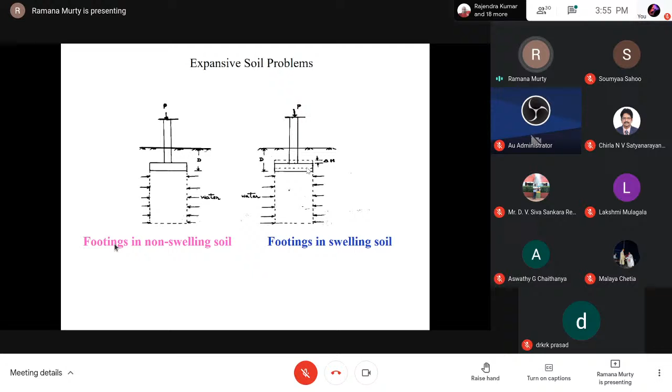Now let us see the mechanism of how this water is gaining strength, as I just referred. All soils will have some quest for water; that is in the form of matric suction, because soils are particulate.

Hello? Sir, can you tell me, are you audible? You are audible, sir, but my video seems to be off, I think. No, it is coming, the slides are moving also. Okay, then it is all right.

So here, these negatively charged particles will attract the positive ions, and once these positive ions are attracted, don't think that this positive is really positive - they also have their own affinity for water. This energy also will be satisfied by negative energy again, meaning anions again will be attracted. If anions are not available, more affinity for water will be there.

Truly speaking, all cations have their own affinity for water; that is what is called cation hydration. That means the negatively charged particle attracted positive ions to satisfy its own problem, and in turn these positive ions are holding water molecules on their surface. This ion is his guest, and again these guests are also his guests.

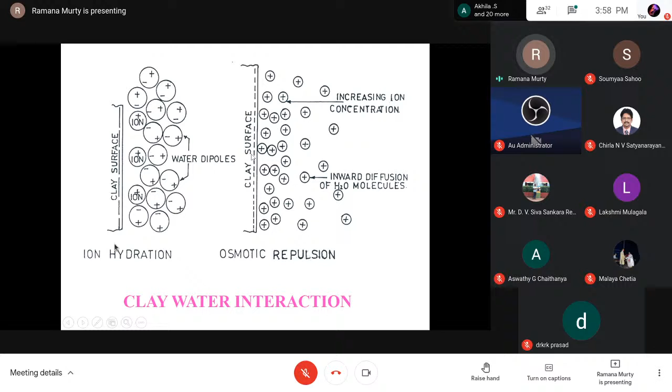Then in the field, when we are taking up projects, we should identify these soils. How can we identify? Sometimes we may confuse also - don't think that all cracks belong only to black cotton soils. This cracking is distinct in case of black cotton soils, just like a map we can see, then we can suspect their presence.

Especially when they are wet, if you are walking on any conventional soils, a little mud can stick to your shoe. But in case of black cotton soils, the thickness of the clay that could attach to your shoe can be up to half a foot. That is possible - that is why there is stickiness to tires and shoes when wet.

Difficulty in breaking a dry soil pat between fingers - this is all because the black cotton soil during shrinkage or drying will be subjected to a suction pressure or desiccation stress of the order of 100 to 150 tons per meter square. That is why, during the shrinkage test, whatever density the pat attains by simple drying, you and me cannot achieve by any amount of rolling. That is all because of the capillary stresses.

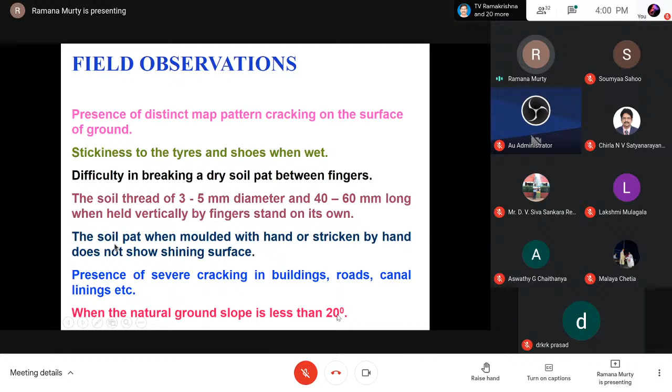Generally in black cotton soil areas, the ground will have a mild slope only, less than 20 degrees. This is how the ground can break even up to 3 meters depth. This cracking could extend, and truly speaking, this type of shrinkage cracking is healthy for cultivation.

Agriculture scientists say when this ground breaks like this, any unwanted materials can be oxidized and neutralized, and it will be fully aerated. That is why this clay can remain healthy for a long time. That is how this type of behavior is appreciated in cultivation or agriculture.

But in case of civil engineering, only the trouble starts. In case any of our infrastructure, especially roads, is constructed on these soils, it simply cracks, and the road material - base course, sub-base course and all that - they are also after all aggregate and soil only, so they also crack. Ultimately, this crack can be reflected to the surface. That is the problem - our pavements can simply break like glass pieces.

This is how the cracking distinctly appears on the surface in the form of a map. Any other soil can also have cracking, but not this intensive. That is how we can identify their presence.

And of course, exactly based on the testing, we can confirm with 100% mineralogical identification - identify the mineral. If it is montmorillonite, definitely it is expansive soil.

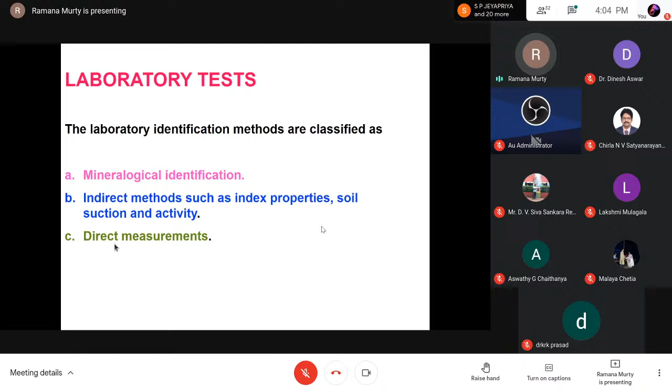That gives both the volume change and also the pressure that could be developed if you suppress the volume change. This is what we were referring to - high liquid limit and low shrinkage limit, suction, all these are the measurements. More suction means more affinity for water. More affinity means more damage. That is how we have to be clear.

And of course, swell tests - differential free swell index is easy. 10 grams of soil passing through 425 sieve, we will place in 100 ml distilled water, and similarly in 100 ml kerosene. The difference in volume divided by original volume, all that we can measure. If it is close to 100, again we have to be careful.

This is what I have just now explained - in the consolidation test, swell potential and swell pressure. Under 5 kPa surcharge, it is allowed to swell and again consolidate it back to its original volume.

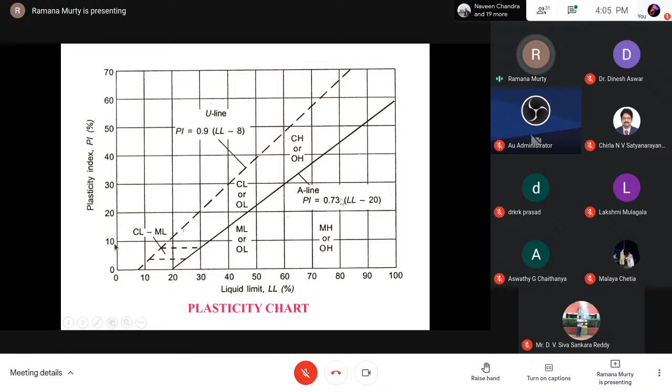And even by simple index Atterberg limits, using this plasticity chart, one can plot the point. See, A line is the Casagrande line. This is another line given, the U line. Points for black cotton soils will fall within this band between A line and U line. U line equation: 0.9 into liquid limit minus 8. This is already known to everybody. And this is another chart given based on the activity of the soils - clay fraction and plasticity index. Depending upon this, these are all divided into different bands.

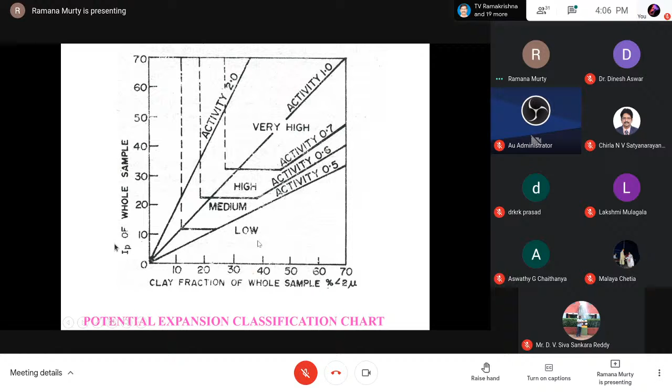If it is falling here, it is high band, medium band, low band—all of that is already mentioned, so one can easily identify the swelling nature of the soils. Different authors have given their own way of identifying these soils, but of course there are several overlaps. Despite that, we can still have an idea.

Just now we said shrinkage limit less than 8 is very critical. Here also similar values, except one or two sources say 10, which is fine. This one is from America again—they have taken multiple parameters. Colloidal means clay colloids, especially if clay colloids are close to 30%, with shrinkage limit just less than 10.

This indicates expansive soil, as a blind rule. So we can suspect, understand, and measure the soil pressure, and accordingly we have to design the foundations.

Then, based on activity, which is plasticity index divided by percent clay, if it is more than 1.25, we can suspect a high degree of expansion.

ASTM has also come out with the expansion index under 1 psi load, just like the consolidation test. Here a 1 psi load is applied, the soil is allowed to swell, and the expansion index is measured. If it is close to 100, it shows a high degree of swelling.

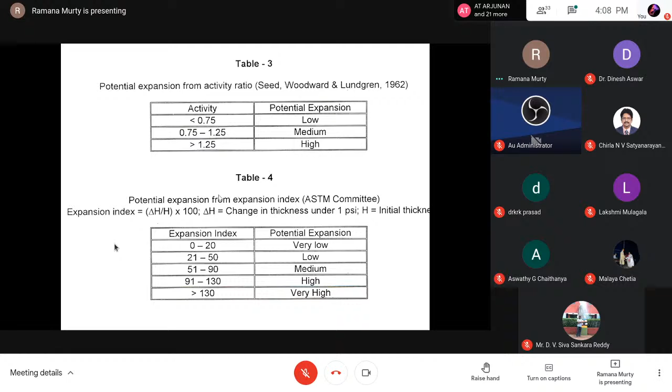Then, regarding suction, as I mentioned, more than 300 is very high. This value is given by Snethen. When the suction is more than this, the soil can show a high degree of swelling.

Please understand, by itself the value will not reflect the whole problem. Expansive soils, despite their problem, if you can protect them against environmental changes, will sleep silently. The problem starts only when the environment changes. By itself the soil may have high degree of swelling, but if the environment is not conducive, it doesn't show its effect.

That is why such foundation techniques are also available—little later we will see that. After understanding these fundamentals, we have come out with some ideas on how to nullify them and how to silence them.

Professor Sridharan, instead of kerosene, has given a method directly with water. For example, 10 grams of oven-dried soil passing through 425 micron sieve is placed in a 100 ml jar, and he has given this measurement.

If it is 4 cc per 1 gram, then the degree of swelling is very high—meaning if 10 grams of soil becomes 40 cc, it is very high. If it is around 3, it will be high, something like that. One can directly depend on this instead of using kerosene and all that.

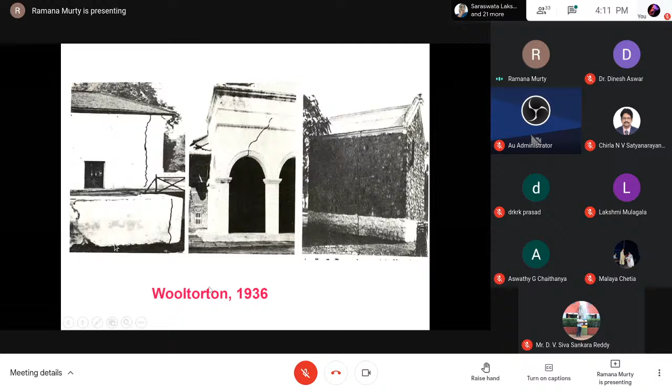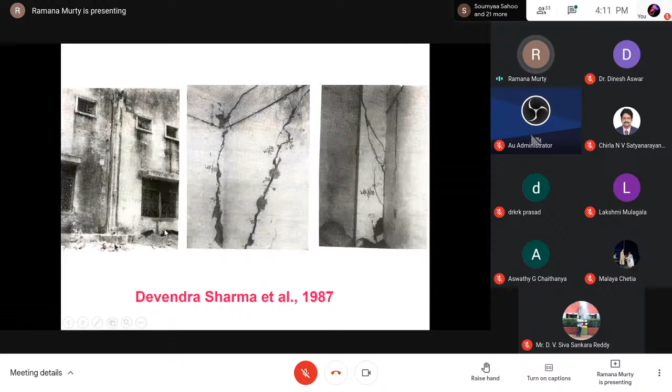He is from Burma actually. This one is from India only. This is also from India. So there have been many failures across the world.

During shrinkage, long snake-like cracking is possible. Once this type of cracking occurs, the rainy season comes and water enters, and the underneath clay becomes slush and mud, which gets pumped out. So pavement distress will be highly accelerated.

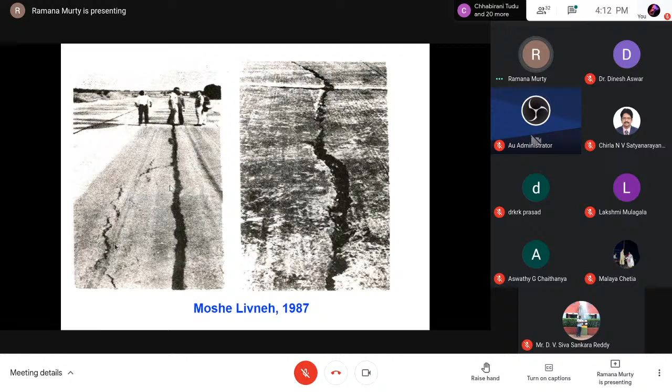So this is the problem with this type of clays present below the pavements. In case of monsoon, the same clay can become like this. Is it highway or mudway?

So friends, despite all this, using the technology, we can silence these soils. Otherwise, it seems very difficult, is it not? But if you understand the mechanisms, you can use that technology and silence these particles so that they do not show this much affinity for water. How are they becoming slushy like this? It is only because these particles are able to hold a lot of water. The sand and gravel do not attract water, but these particles are attracting water. That is the very problem.

Of course, that is only the source of life. I have just now already said, at clay mineralogy, you will see the philosophy behind all this.

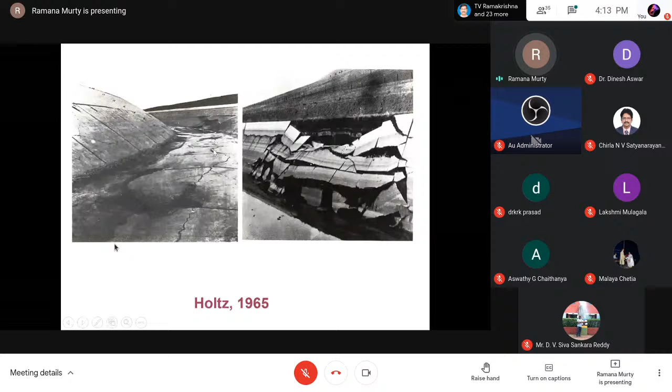Yeah, these are some of the failures even for the canal linings. Crores of rupees we may lose because of these losses. This is again Kakatiya Canal passing through Warangal city, and it is peculiar. It is from Sri Ram Sagar project, 280 kilometers away, only near Warangal, close to KITS Engineering College, for 100 meters long, severe cracking we have observed. And to my surprise, the clay behind, when we tested, the differential free swell index was around 700%.

Very peculiar, only there. Beyond that, it is not there. And of course, for such a high degree of swelling, CNS layer technique is only available in case we do not want this type of failure. Maybe it is better to supplement two techniques: first silence the clay using some lime or calcium chloride, something like that, then put the lining, CNS layer, then lining. Otherwise, again, 700 DFS means merely CNS layer also may fail. In fact, here also CNS layer was provided, despite all that, this is the failure.

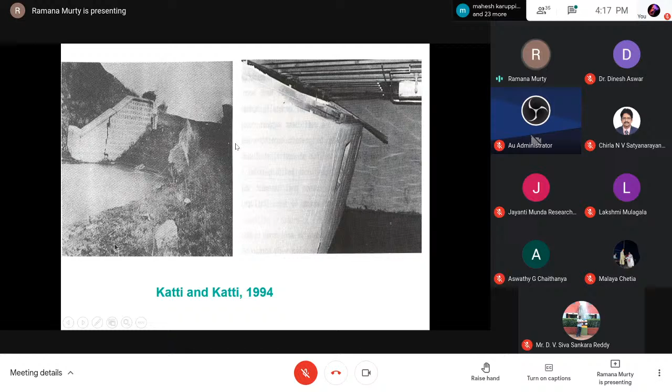Okay, at several swimming pools, etc., in fact, I myself was consulted, and again we have given the same suggestion. Fortunately, that technique worked very well. When I suggested filling good soils at 45 degrees, almost all walls became safe. In fact, there were some failures, and subsequently they could be addressed like that.

Yeah, these are some of the failures in Ordnance Factory, Hyderabad. In fact, during 2013, NIT Warangal was asked to give a certification to their campus buildings. There is, it seems, a norm: as per the defense norms, these buildings are to be certified by the institute every 5 years. So we were asked to do that during '13, and a team of our professors visited several times. And it is also very peculiar.

The area of this Ordnance Factory is around 3,000 acres, out of which almost half the land is black cotton soil, and the other side is all moram soil. On the black cotton soil area, they constructed some 800 staff quarters. I think they said it was during 1985, something like that. So subsequently, these quarters were subjected to this, and they almost became non-livable. See how critical the condition is. All these were simply broken.

These floorings, etc. See, that is why we can easily understand how much load will come on each beam, which we calculate in RCC designs. See how even nature has demonstrated it - this trapezium shape. When it is held and lifted, it breaks like that. In fact, the doors also sometimes we cannot open. That is how it has become.

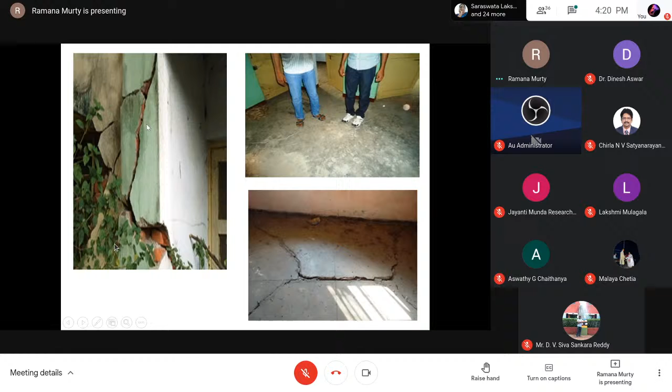Yeah, this is how we were observing, and this is again internationally also. We normally see that if you say something, people also may not believe. Then for the same conditions, internationally also, you see this figure we have taken from Professor Chen's textbook. He has exactly shown below the strip footing, continuous footing, the failure. So it is matched - so we could convince the officials why we are really suggesting demolition of them.

Yeah, here in fact the whole mechanism lies for this type of behavior. Friends, nature is so great - out of a great process, clay is formed. Like our blood, milk, clay is one of the extraordinary makings by nature, because it is this clay which supports all the life - bacteria, virus, fungus, and through that again all the plants, and through that again all the life, the animal kingdom.

Otherwise, in the absence of this clay, nothing could live in this world. That is why one of the philosophers says the true prosperity of a nation lies in its clay. Simple statement. If not immediately, in the long run also one can ultimately understand this truth only - the true prosperity of a nation lies in its clay.

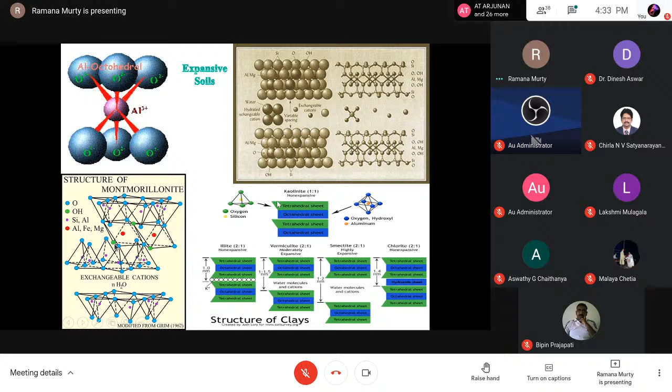At least it will stay with the clay unless the environment is changed to a greater degree. So like that, we have to silence the system. At the same time, we have to be very clear, we are not changing the mineral, friends. Please understand, these are already transplanted, they are like that. We are not doing anything. On the surface only the ointment is being applied in the form of stabilization, to satisfy the negative charge. That is how we have to understand our stabilization techniques.

Of course, all these different clay minerals - this is, of course, smectite, meaning montmorillonite only. In fact, vermiculite is again more swelling than montmorillonite, but fortunately in nature the content of vermiculite is less compared to montmorillonite.

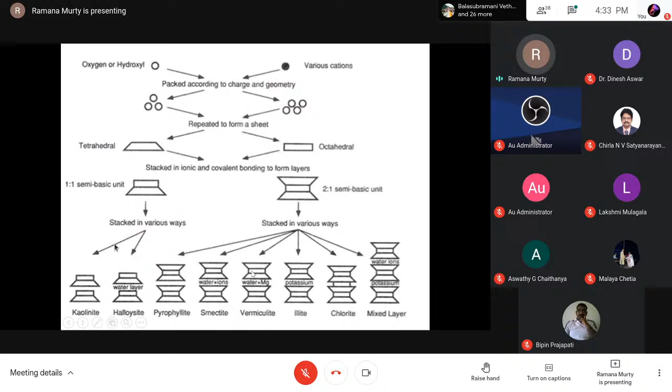All these principles you cannot blindly apply to this type of system. That is why Terzaghi himself said, in case of highly plastic clays, my theory of consolidation is doubtful, and also the effective stress principle.

Under remediation, clays are giving problems. In case the thickness is thin, remove that, be happy - that is how the soil replacement concept was given. As long as the thickness is shallow, within 1 meter, we can happily remove it and replace it with good soil, then all the problems were nullified as a civil engineer.

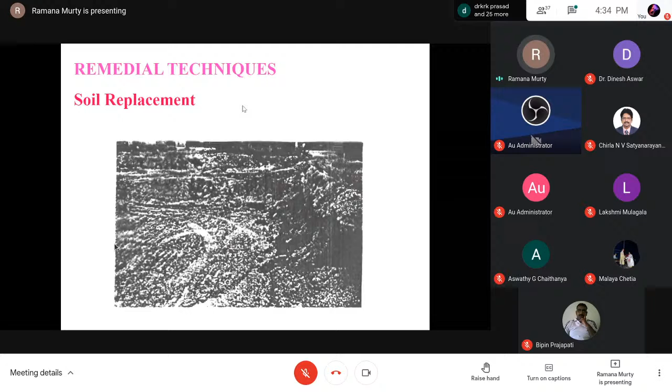Of course, another idea - this clay, just now I have said, despite all the aggressive swell potential it has, it is only the environment that triggers the swelling nature. If at all I can create an environment such that the clay can remain in one condition, then it also keeps quiet. Philosophy is excellent, but in actual practice, this technique was not that successful.

The philosophy of this is, anyway it is attracting water subsequently after construction and again undergoing volume change. So much before construction itself, we apply water, then it will be saturated, construct, close it, then as long as that high degree of moisture content is there, it will not undergo higher volume change. Philosophy is correct, but however in actual practice there were several problems also, because here it is not only volume change, bearing capacity is affected.

The moment you pond all the area, it becomes slushy, the required bearing capacity also we will not get - another problem. And in fact, some researchers have reported this high moisture content will not remain there only, it can pass through to the other zones where the moisture content is less, and again it triggers the swelling there. Ultimately, that is why this technique is not that popular across the world.

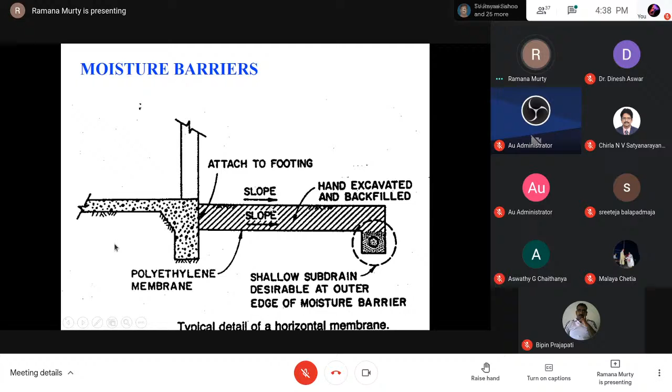Of course, for pavements, etc., this type of vertical moisture barriers are suggested. Of course, Professor Chen, what he has written, yes, all these moisture barriers can slow down the process of saturation, but ultimately everything will be saturated. But just now I said, despite that, the damage potential will be less because of this low entry of water.

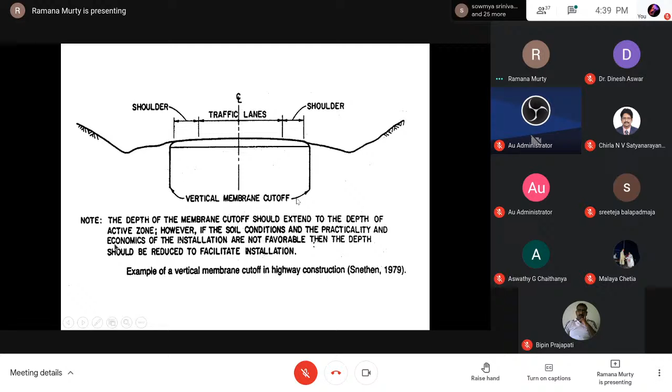This is again lime stabilization, cement stabilization, all this again, we have to mix with the soil, plow it, then roll it. Not easy. In fact, recently we were asked to give a suggestion for a rural road in Guntur district for lime stabilization. When we have given that suggestion, in fact, honestly, the contractor has taken our report and started the work. But the whole problem is the IRC suggests that all the soil to be lime stabilized should pass through,

I think 25 mm, and 80% of that should pass through 4.75 mm. See this, it has become very difficult for him. Ultimately, he could not pulverize.

Later on, again, we were forced to change our report, indicating that until state-of-the-art equipment could be imported by India, these techniques may be difficult for their implementation in practice, something like that.

But fortunately, in the recent times, we could see Stable Road. It is from Germany. That is doing excellent job. In Vijayawada, in fact, for one of the roads near Poranki, we have suggested that there, that machine itself will

excavate. If necessary, dry it also a little. Then whatever the cement content you suggest, that will be added. And after adding it again compacts, that means all in one. Excellent. After that, we have become little confident to do some stabilization.

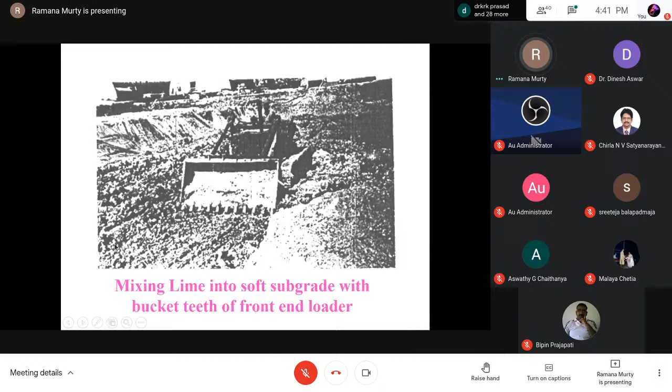Yeah, again, at the end of that, again, it must be properly compacted also. Yeah, this is what I am referring. This road only, degree of pulverization could not be made. In fact, for 2 months he struggled. Ultimately, when the degree of pulverization is not adequate as per the standards, again stabilization remains doubtful.

And in case if it is not worked, we will be blamed and he will be blamed. So then what we have written is, again we asked them to recompact the whole thing as usual. Then 2 feet thickness of the murrum cushion we have suggested to be placed on this clay bed, so that based on that 2 feet thickness of the murrum, the CBR value was arrived at, and then the pavement design was made and constructed.

Okay, in that report only we have suggested, because they wanted to send that report to the rural development ministry. So in that we have written the same lines: until the state of the art equipment could be procured by India, these state of the art stabilization techniques cannot be implemented in the field, something like that.

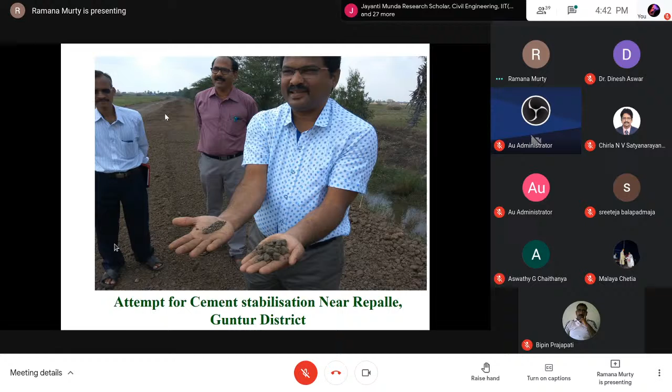This is again where everybody outside asks us, sir, we will place some sand in the foundation, is it okay?

Normally in some research papers it is written that sand cushion becomes effective when you research within 1 or 2 years. We may feel it is effective, but beyond that it also becomes very hard. When it has some way to accommodate the volume change from the underneath clay, just like a cushion it can act, but after a few years it also will be densified and ultimately become very stiff.

Along with this lifting, the foundation also will be lifted. That is the problem. At the same time, sand being highly permeable, it also attracts water quickly, as I have already said. If anything enters quickly, there lies more danger.

In fact, at Mote village in Karimnagar district, some time back, government built a colony for poor people. It is all black cotton soil area, so we do not know - somebody suggested they have gone up to 9 or 10 feet depth.

It is not footing foundations, but continuous foundation - 10 feet depth trench, filled up to 7 feet with sand. They again constructed the footings and came out. After all, they are all single-storied buildings only, so you can imagine top 3 meters, below 3 meters.

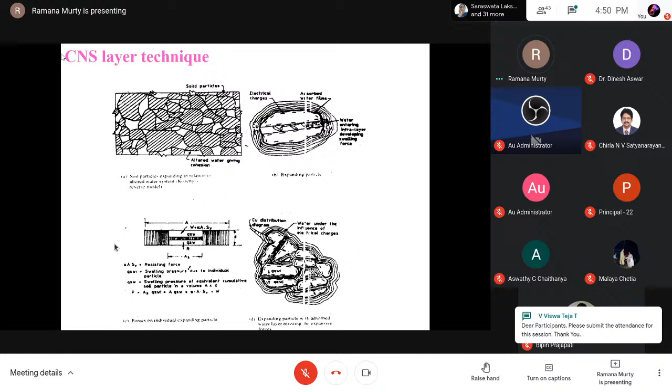So in this direction, though conceptually it seems very nice, in reality again there are problems, in the sense that the material specifications are not that easy to satisfy. In Telangana region, as we are here, mostly we are fortunate that moram soils satisfy to the extent possible, though not exactly, to some extent. But that cohesion must be there, and that cohesion is being satisfied, though other contents are not that satisfied.

And again here also, Katti's suggestion is very difficult to follow. What he suggested: if you are constructing a home, all the area below the building, over the entire plan area, is to be excavated around 2 meters. Then the CNS layer is to be compacted by 1 meter, construct your footings, then fill back again. Very difficult. So anyway, that is how, friends.

At present, based on our experience, what we are suggesting, in case this is to be adopted, is 1 feet extra on all sides of the footing. Construct like that, with a minimum 1 meter thickness, and here also this clay, everything will be there.

Anyway, basement filling can be made using the same CNS soil so that it will mostly be free from cracking. And of course, if the black cotton soil has a high degree of swelling, it is still better to supplement two techniques instead of only one. Here, simply put a few bore holes, either calcium chloride or even lime can be filled, and then filling here the moram soil will be useful.

Of course, above the ground level, to have the plinth, that plinth filling must use the cohesive non-swelling soil layer. Below that, anyway, clay is present.

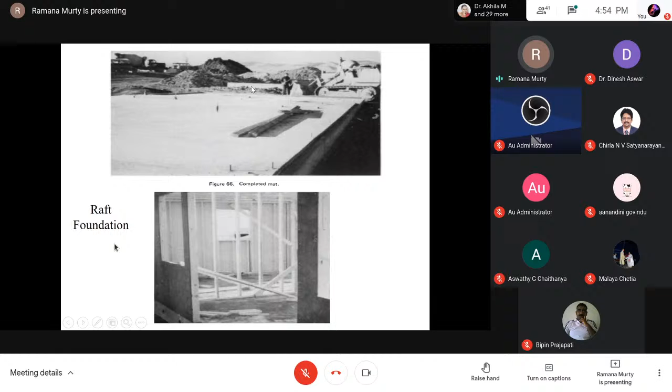But the cost is again too much. That is another problem with this raft foundation. If it is a lightweight structure, all the money will go to casting this raft only, and ultimately we will not have any money to construct our home. That is the problem. So don't think this only applies to the building and its foundation.

Sometimes slabs on the ground, basement floors, all this comes under that category too. In the slab on ground concept, all these flooring slabs are placed on the ground, and you can see how they are subjected to damage. Exactly at 0.6 to 1 meter distance, this type of failure was noticed all across the world.

That is why Professor Chen suggests that at this location, around 0.6 meters, if you provide a joint, it will move right there. At 0.6 meter distance, provide a flexible joint so that it can slide along that joint, and this type of failure can be avoided.

If we have sufficient money, it is better not to depend on slabs on the ground at all, rather than this type of slab on ground. We can go for structural floors also.

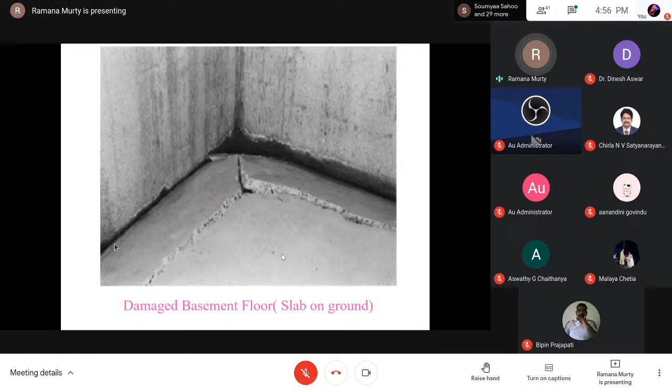When the slab must be constructed on the ground itself, some techniques are suggested. Don't directly place the slab on the ground. Inside, put some form work to create honeycomb holes. That means the swelling, if present, can be accommodated into this opening rather than exerting pressure on the floor slab. That is how these designs were suggested in cases where slabs on expansive soils are inevitable.

Below the grade beams also, this void is needed, even in our under-reamed piles, all along the grade beam below that a 10 centimeter air gap is suggested by the code. In other countries they maintain this using concrete panels. In India, we can easily do that by placing bricks on edge on both sides so that this void can be maintained.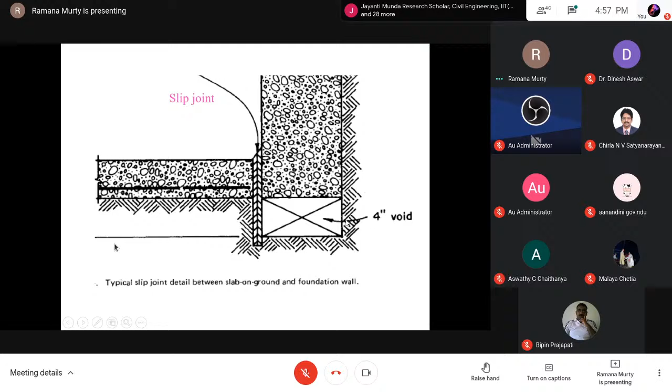This is what I was referring to. See the connections, water supply - when this floor slab is lifted up, this is subjected to distress, and the whole wall itself is subjected to buckling because of the lifting from the floor slab. So it is better to have a slip joint here or here, then this pressure will not be exerted on the superstructure.

Even for partition walls, we should not be too careless. Simply constructing a partition wall between the ground floor and the upper floor means the moment this floor slab lifts, enormous pressure will be exerted through this wall onto the roof slab. So to overcome that, this type of joint is suggested, so that even if it moves, it doesn't harm the superstructure.

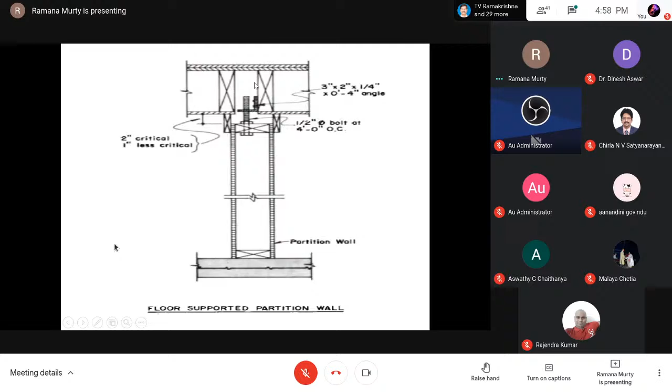These are some ideas suggested across the world. All around the building, in case there is some problem, grouts can be injected. The range of grouts varies from organics, lime, calcium chloride, to recently developed chemicals. Based on requirement, efficiency, and the consultant's suggestion, such chemicals are injected into the foundation in case there is damage to the structure, as a remedy adopted all around the damaged structure.

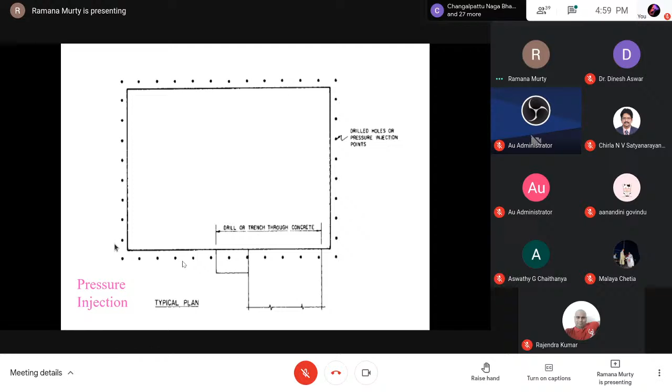This type of stabilization is attempted under pressure injection. Here also the limitation is that clay only absorbs the chemical grouts when it is dry and has desiccation cracks. When it is wet, nothing can be injected into it. That is another problem.

These are some of the remedial suggestions. Be careful and always provide for movement. Sometimes the partition need not be supported on the flooring - it can be suspended from the roof slab also. In that case, a slip joint can be provided wherever required to accommodate the movement. You should not be blind to this; somehow everything has to be taken care of.

This is what I was referring to - in case of continuous walls or continuous footings also, give a gap. Don't provide it continuously. If that is the case, we really need to go for this type of construction with gaps, or go for pad foundation itself, and provide a grade beam here. That is wiser than having this type of voids in between.

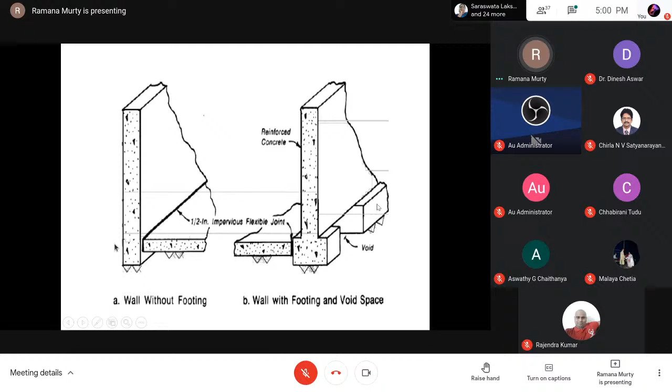This is how the void below the grade beams is maintained, using precast concrete and so on. But in India, we are using simple bricks, which is enough also, and we can maintain that gap easily.

Here again, the gradient is very important, as we were just referring to. The precautions are all given here. If capillarity is to be broken, put large size aggregate, then a geomembrane or something similar so that the moisture content does not go up. All these precautions are given again to protect our floors.

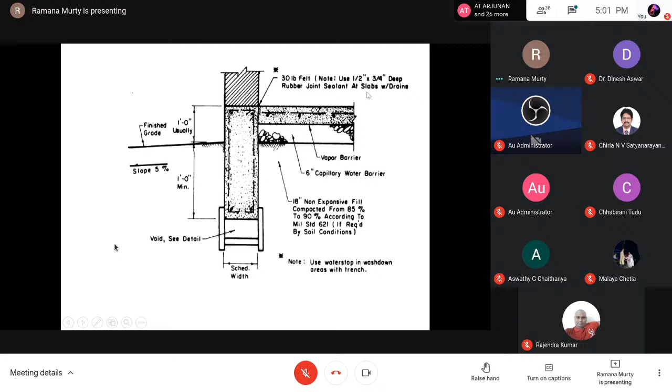This is another idea - in case the natural ground system will not really allow it, a mound is formed, and on top of this mound a geomembrane is placed. Over that, good non-expansive soil is placed, and on that a raft foundation is constructed. As I said in the beginning, it is the environment that triggers the swelling, so all these slopes are maintained so that water can easily go away from this zone - then it may be safe. That is how this type of idea is used, especially when the degree of swelling is too severe.

All the water supply and sewage lines are also kept well within the non-expansive soil.

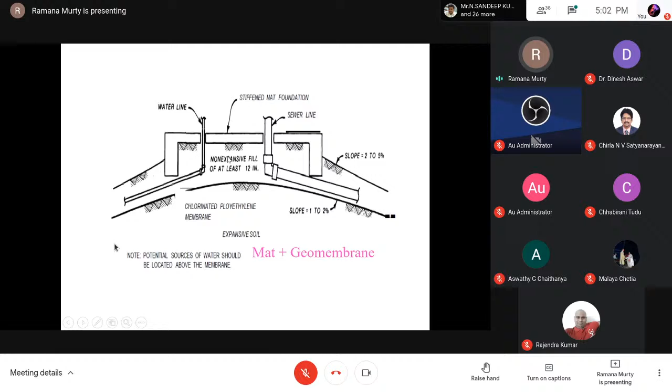This is how sometimes a geomembrane can be supplemented. In fact, at Hyderabad Ordnance Factory, we did not suggest this geomembrane because that much accuracy may not be followed, and ultimately we do not know what happens - on the name of adopting this geomembrane, they may compromise other quality. Instead, we suggested placing a minimum 2 feet thickness of CNS soil over that, after removing all the grass, sloping it like this, and at the end giving a trench of 1 feet thickness filled with aggregate so that rainwater is collected and discharged into the street drain. Something like that we suggested.

Now let us see some of our personal experiences.

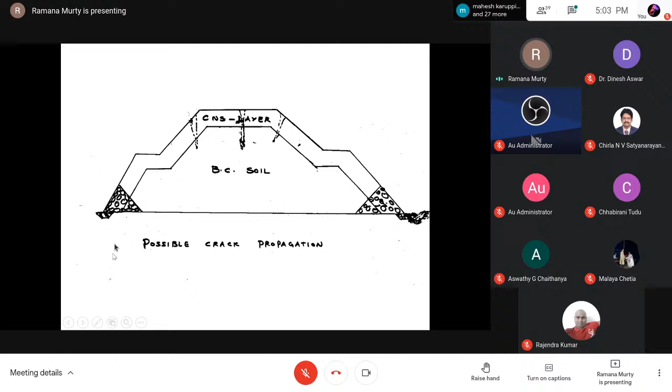This is the flood bank constructed for Singareni Collieries, about 5.6 kilometers long, near Ramagundam. The height is around 5 to 6 meters, with one place at around 7 meters. This was constructed during 2000. Immediately after completion, within one season, the entire embankment severely cracked.

It was all built only of black cotton soil because at that location no other soil is available. We had given the technical report suggesting it can be used, but with a protection layer of CNS layer. Accordingly, everything was done, and ultimately this is the situation. Uneasiness was there, and the payment was stopped to the contractor because of the severe cracking.

Subsequently, we were called to the site again, and we suggested this: this is all a very natural process, it has reflected what all is truth. If it is not reflected now, tomorrow it can reflect. Instead of penalizing the contracting agency, let it be closed repeatedly with the same CNS material - within 2 to 3 seasons the whole system will come to its own self-equilibrium.

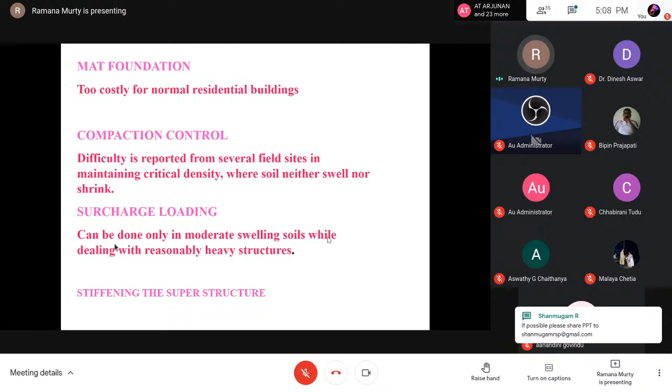Surcharge loading: if the swell pressure is, say, 10 tons per meter square, if you keep 10 tons per meter square, it can remain silent. That is the philosophy. But the problem is, sometimes in some locations this was a success, but in certain locations it did not work. The whole problem is, you determine 10 tons per meter square and keep the foundation load exactly like that, but underneath, if there is some other layer with more swell pressure, that becomes a problem. So if the soil does not have uniform swelling nature, then this technique is also a little doubtful.

Then stiffening the superstructure, in the sense RCC bands are generally provided at different locations, at the window level, top of the window anyway that lintel is cast, and that lintel is made continuous, so that at different levels, with these RCC bands present, crack propagation can be controlled. Only to that extent.

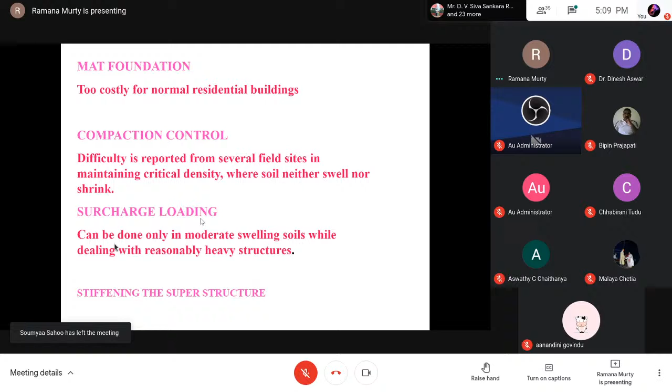So in fact, extensive research we have taken up at NIT Warangal to understand the concepts and develop techniques as remedial measures against these swelling problems. We have selected a site on the campus. Fortunately, our own campus is covered by black cotton soil, so we need not confine ourselves to the laboratory, and I have gone to the field. Almost all this work was done in the field.

And for the first time, swell pressure is to be determined, because if you look at any literature, almost all designs are based on swell pressure. So field swell pressure we have found first for the selected site.

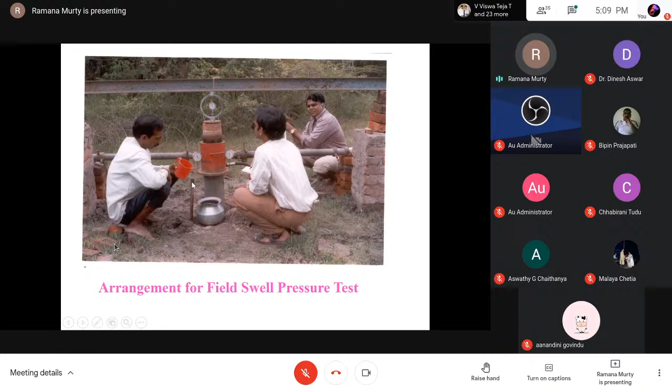This is how at 1.2 meters the test plate is arranged after placing a little sand, and this test was done by the constant volume method. Just now I was referring to the consolidometer test, where the volume change is fully allowed and it is again consolidated back to its original volume. Here it is not that procedure; it is another procedure called constant volume, in the sense water is fed from the top, and as and when the dial gauges move, additional load is applied through this proving ring to bring back these dial gauge readings to the initial reading. Ultimately, whatever load is recorded divided by the area is the swell pressure.

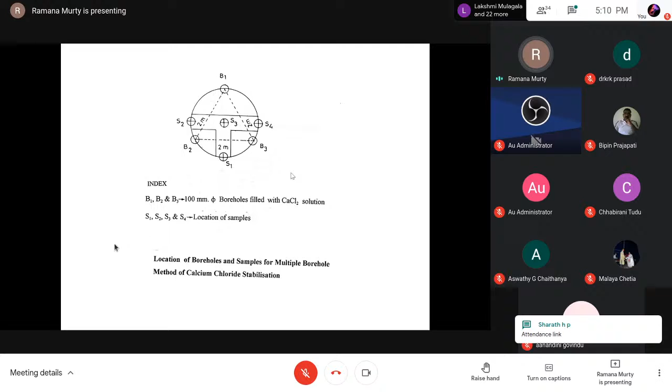Like that. Again, in this work we have done comparative studies between lime and calcium chloride, because the philosophy of lime is that only 1.25 grams of lime is soluble in 1 liter of water. That means there is a limit to how much concentration of calcium we can really have in lime stabilization. So with that gap in the concept, we tried to use calcium chloride as an alternative in place of lime, because calcium chloride, being a strong electrolyte, whatever concentration I want I can have, and it is highly soluble.

Then you may ask a question: if it is too soluble, can it be washed away also? See, that is how we have to be very clear. As we were just referring, clay particle surfaces are negatively charged.

Once they hold these cations, either from lime or calcium chloride, after all it is calcium, it should be held by it. In case of any chemical environmental change, that replacement takes place, either for lime or the calcium chloride. That is how we have convinced ourselves.

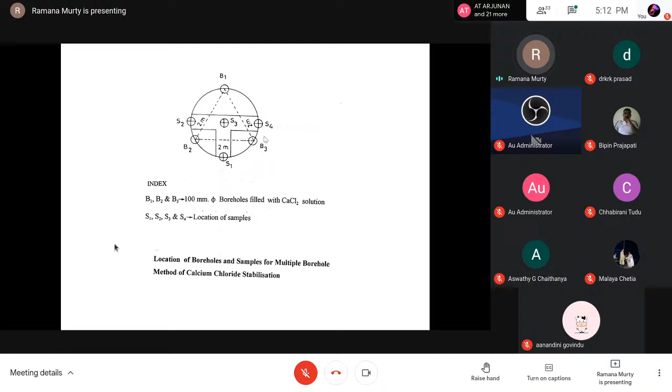Again, here a trench was ponded with calcium chloride, and at different depths and radial distances, the samples were collected and tested for their index properties and swell pressure. Interestingly, between calcium chloride and lime, there is a lot of difference.

Lime, you see, the problem is away from the borehole, it could not travel much, only through the cracks. This experimentation was done in summer. When we poured the lime slurry, it could simply flow into the cracks only. Later, of course, we gave sufficient time, but still the diffusion from the crack into the clod is very minimal. That is why, beyond this 1 meter, 1.5, the variation is almost negligible.

Whereas calcium chloride could enter into this clay bed, because it is like water only, right? Salt water like.

Yeah, this is how we have measured the heaving of the ground also, by placing the stone slabs on the ponded test trench. This is only around 32 mm, whereas the original ground heaved up by 112 mm.

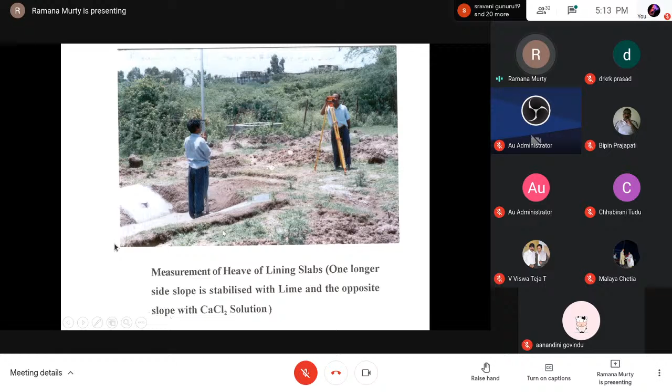This is another experiment where, to simulate the canal linings, the same trench was excavated and lined. On one side calcium chloride is used, and on the other side lime is used. Then, interestingly, on the lime side, this lining is cracked, right? That again supports the claim that its effectiveness is doubtful.

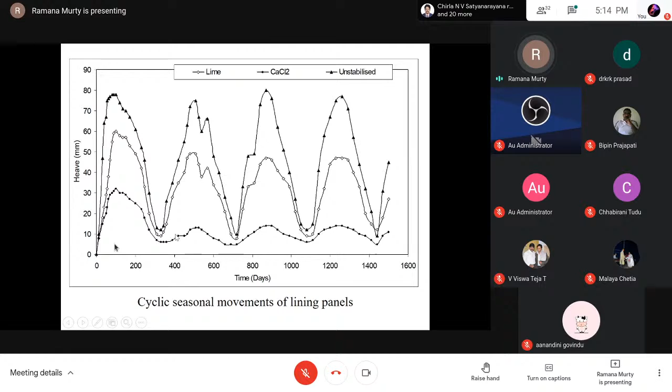And of course here, comparative statements, you see: unstabilized, lime stabilized, calcium chloride stabilized, right? Calcium chloride could effectively reduce the volume change below the lining panels.

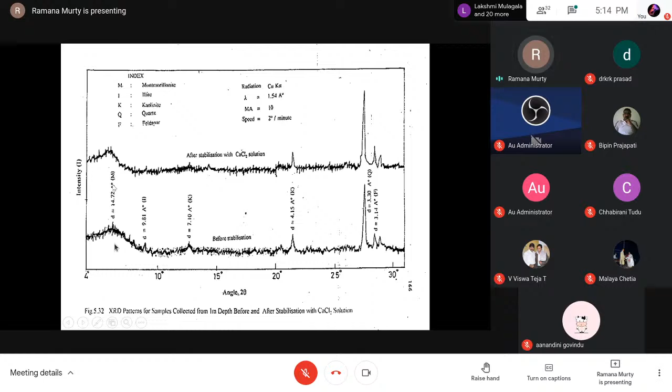And of course, the clay was analyzed for its minerals, and here we have noticed montmorillonite is present in the clay. This is actually what I was referring to. Exactly, if we have to say, we have to do the mineralogical study only.

Then, again, another idea what we floated: CNS soil is not available at several project sites, and there is a compromise. Wherever there was a compromise, some failure took place. Instead of that, why don't we make the CNS soil from the same black cotton soil? Okay, one attempt, nothing wrong in that.

So to that extent, what we have done is that the black cotton soil is excavated, pulverized, and mixed with different proportions of rice husk ash and calcium chloride. To our understanding, 0.5% calcium chloride and 8% rice husk ash has given almost zero swell properties. And even 1% calcium chloride with 6% rice husk ash also has given the same thing.

So why don't we then try to have this type of mix so that it can be directly used as a CNS material? That means the same can be addressed by the same homeopathic law — black cotton soil is a problem, make the medicine from the same thing. That is how, friends, this is what we have tried.

And here, the CNS soil specifications are all given by Professor Katti. And for the material I was just referring to, 0.5% calcium chloride, 8% rice husk ash to the black cotton soil — these are the properties.

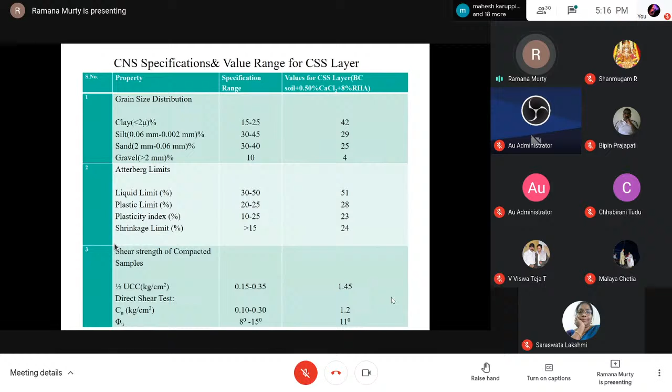So based on this philosophy, we have experimented with a few pavement panels constructed using this prepared artificial CNS material. We have called it CSS soil, chemically stabilized soil, as CNS soil. And friends, in fact, all these works were published in ACE.

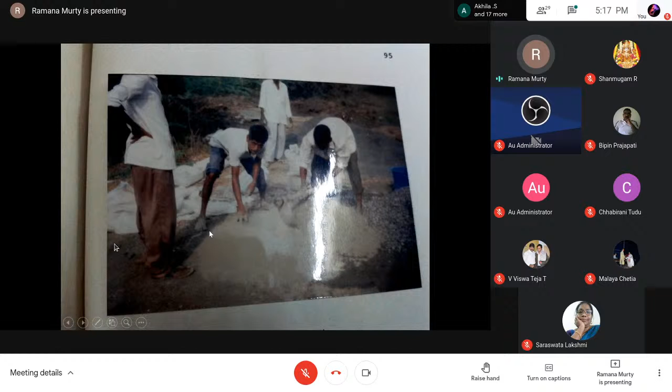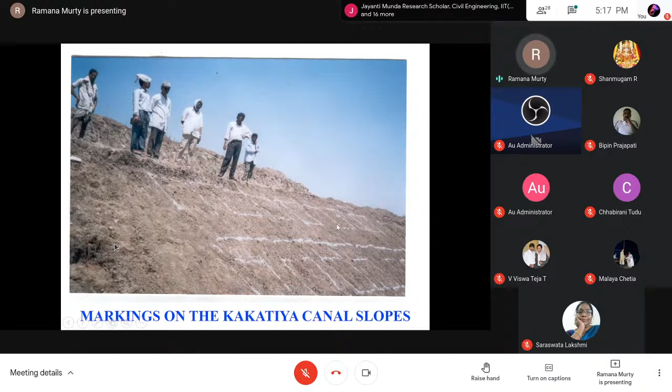Yeah, that is what is rolled in layers. Then panels were cast, right? So again, stone slabs were fixed, and heave measurements were made. This is another attempt we have made on Kakatiya canal slopes, where the lining panels were cast with different treatment alternatives. Let us see what we have done.

Here are some of the experimental sketches selected. The same CSS soil concept I have used in the pavement construction. Here also we have prepared by pulverizing, then mixed with rice husk ash and 1%, 0.5% calcium chloride used for some sand we have used.

At this location there was a problem of CNS layer, so they went for rock dust. As one of the alternatives we have used that also. So whatever all the possibilities, everything we have experimented here, right? All these panels were completed like that.

For some panels, that is what we have suggested: multiple treatments are more effective. That is what we have named hybrid systems, combining two instead of one. Some cushion plus tension piles, right? This is how we have experimented on the same slopes.

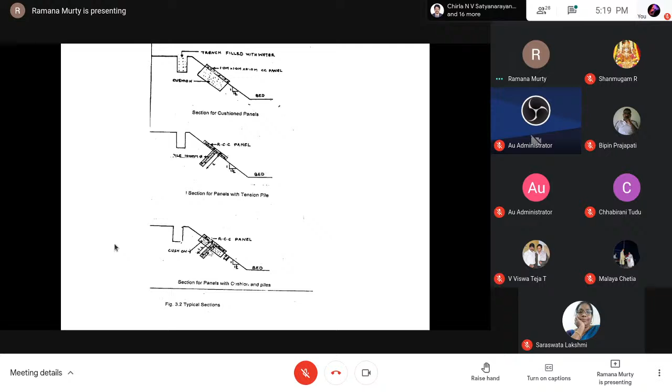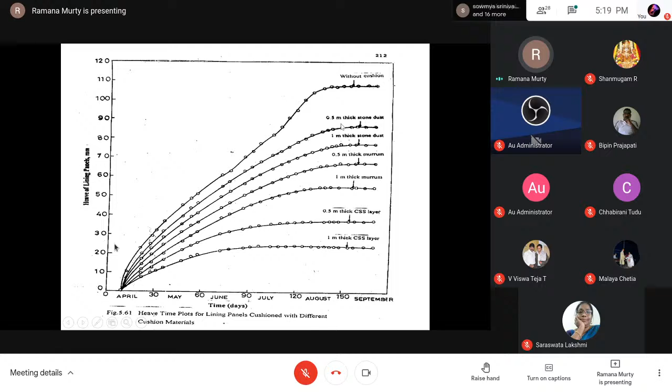Then stone dust - when they say CNS soil is very difficult and we go for stone dust, when we use stone it is like sand only, then water could easily enter into that and a high amount of volume change takes place, right? So you can understand this.

As there was no CNS soil available for few stretches, the department allowed use of this rock dust, and ultimately for about half kilometer to 1 kilometer, continuous crack is formed in the lining like this, right? That is how sand, stone dust, etc. are not at all to be used in this type of soil.

And this is another idea we have made. Underreamed pile foundation is popular, but then difficult - sometimes bulb formation is always doubtful. Instead, what we have suggested...

Go for footing foundation only, because it is more convenient to the people. Connect this footing to the tension pile. Simple - whatever uplift pressure is exerted can be countered by this. And of course, it is not simply by the shaft resistance, but our philosophy is that when it is subjected to swelling, the horizontal swell pressure, as I just referred, is several times that of the vertical swell pressure.

That means this itself will hold tightly during that swelling process. And in that critical state, when it is holding with a high degree of lateral swell pressure, the volume change will be reduced, because expansive soils are sensitive to the initial restraint. That philosophy we have used here, right?

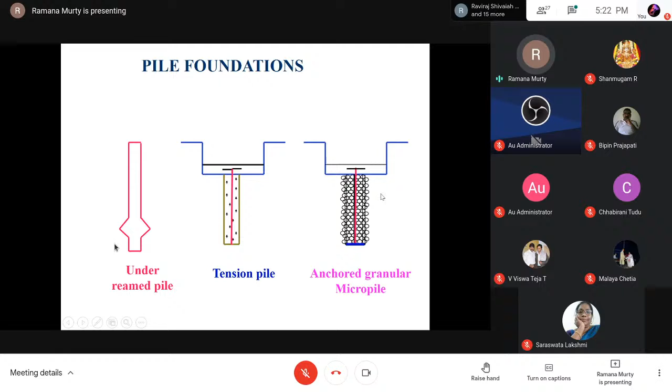In fact, when we conducted the uplift tests, the uplift resistance is double that of the straight shaft piles for these anchored granular piles. Of course, everybody knows about underreamed piles, but however the difficulty here is only the bulb formation - if it is not really formed, then the whole design will go wrong.

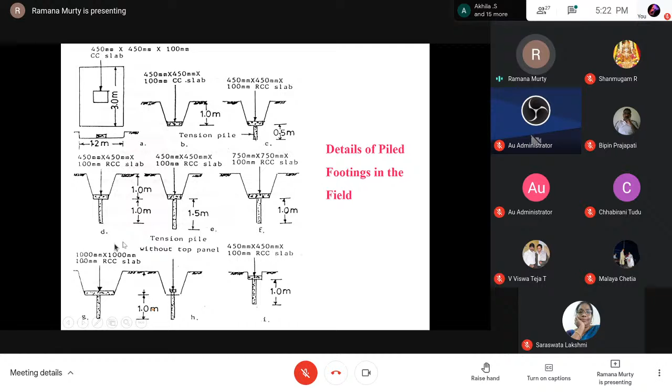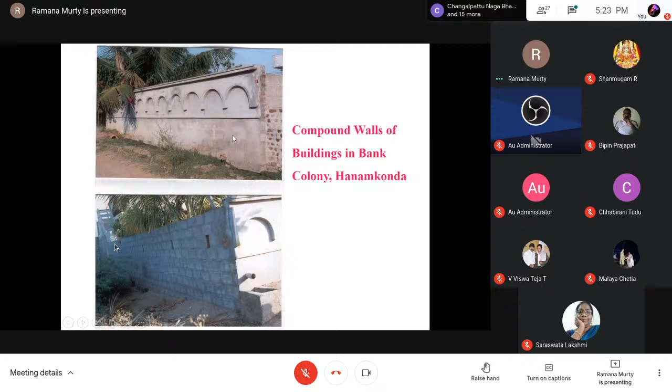This is the site where we have experimented with the tension piles, with different lengths and diameters. In fact, for some of the walls, we suggested to use the tension piles, and you see no single crack is formed. And for the TV tower foundation structure near Warangal, we suggested this piled footing for around 800 meters long compound wall.

There it is all black cotton soil, but they wanted to go for some stone masonry. For that we suggested like this, with columns in between the stone masonry in some places. That is how we suggested to them - simple idea, and even now no single crack is formed. Around that, private buildings, you can see some cracks.

And here it is a little modification to that - for some residential buildings also, a similar idea we gave near our institute guest house. One private owner, when he approached us, we suggested below the footing, two tension piles, cast like this. For the compound wall also, almost similar idea only.

Here again, below the footing, we suggested two instead of one, because in case of any volume change, unnecessarily he will be in trouble. So reposing confidence on our technique, he has used it, and fortunately no cracking was subsequently there.

This is what I am referring to for that TV tower station. For that also similar design was used. Instead, here CRS masonry was used, and occasionally some concrete columns are also provided in between to break the continuity of this masonry.

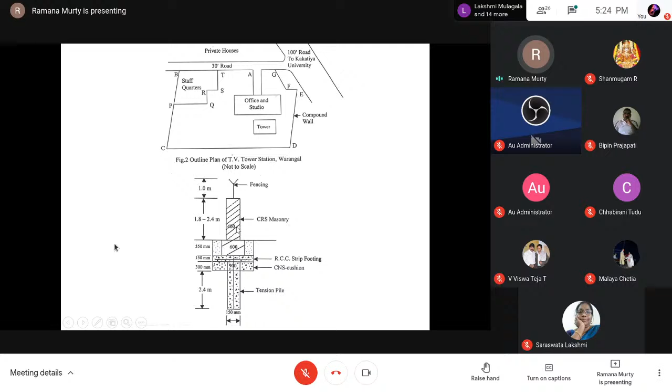So that is ensured. Here the real difficulty is its installation, because it is not yet mechanized. The moment it is mechanized, it will be very useful. And we ourselves have found uplift capacity is much more than the straight shaft piles.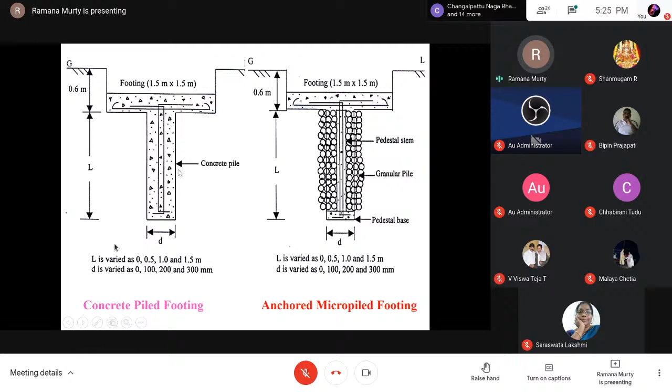And friends, in fact, for this part of the work only, we were recognized by the Institution of Engineers London in 2015. This work is considered to be one of the most popular works from India.

Again, in continuation of that, we have also experimented. Ultimately, whatever research we do, we have to demonstrate to reality as closely as possible. Compound walls were constructed demonstratively, some 3 meters height, and then different techniques were adopted.

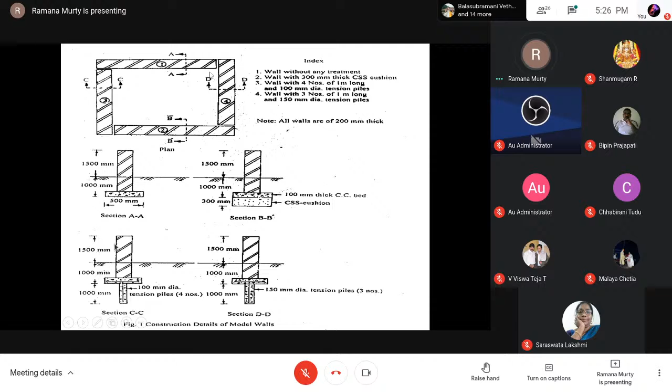And in another wall, 4 numbers of 1 meter long, 100mm diameter tension piles. And again here 3 numbers, 1 meter long, 150mm diameter tension piles. For all these walls these variables were used, and again heave measurements were made.

Interestingly, whatever technique you adopt, the volume change is within 20, right? This is what actually the code also allows, below 20. This is also a study we have carried out at our campus near our guest house.

I said it is all black cotton soil area. Here our interest was to prevent reflection crack formation. Pavements, when they are built on clay substrates, this clay will be subjected to desiccation cracking, and this desiccation cracking can spread to the surface, extend to the surface. That is what is called reflection cracking.

In order to mitigate that problem, we studied all the techniques that are already prevalent in this world against these volume changes, and experimented with them. Relatively, we can understand which is better. And of course geotextile also we have used.

Let us see now what we have done. In one case, 0.3 meters thickness of sand, then a geotextile, and 0.3 meter thickness of murrum - this is one type. In another stretch, all 2 feet thickness is only murrum.

In another stretch, the black cotton soil was excavated up to 2 feet thickness, 10% lime was mixed and again compacted, and again 2 feet thickness of murrum was placed, and the system is closed. Different variables were used and heave measurements were taken.

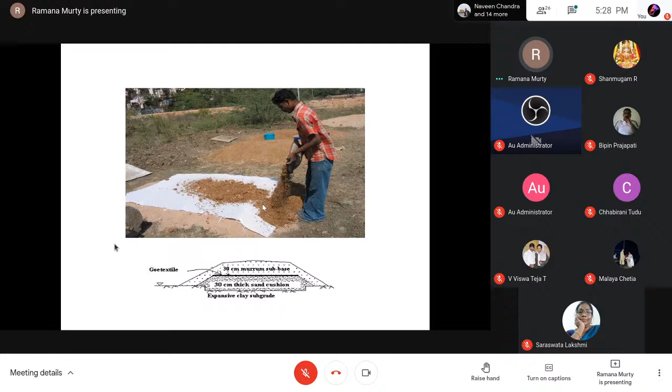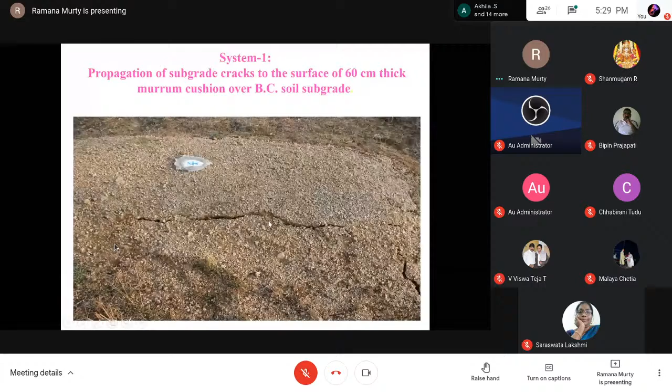And in the other case, 30 centimeter thick sand cushion and 30 centimeter thick murrum - just now I showed you here. You see the fate of it, broken like glass, right?

That means sand, the moment it is provided, allows quick ingress of moisture, and ultimately a lot of volume change can occur and movements are possible. And here geotextile reinforced 30 centimeters thick sand cushion and 30 centimeter murrum - even when geotextile is placed in between, that also could not prevent the cracking when sand is present.

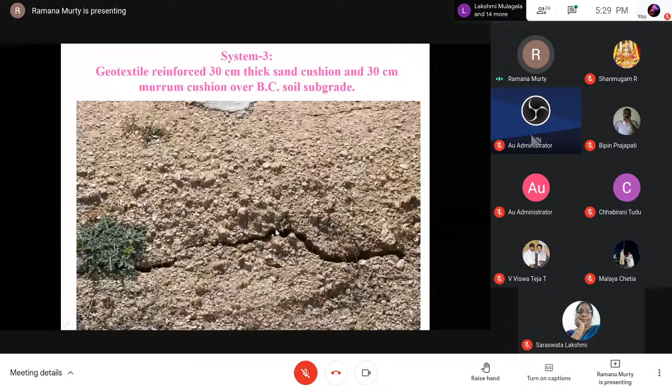And here calcium chloride, when it is used, volume change in terms of swelling may be controlled, but the shrinkage cracking cannot be controlled. That is the problem here.

The ground is stabilized, and IRC suggested CNS cushion also was used, but still cracking has become inevitable. And 10% lime stabilized with 60 centimeter thick murrum, still cracking is inevitable. And 6% cement stabilized subgrade with 60 centimeter thick murrum cushion - even then it is cracked.

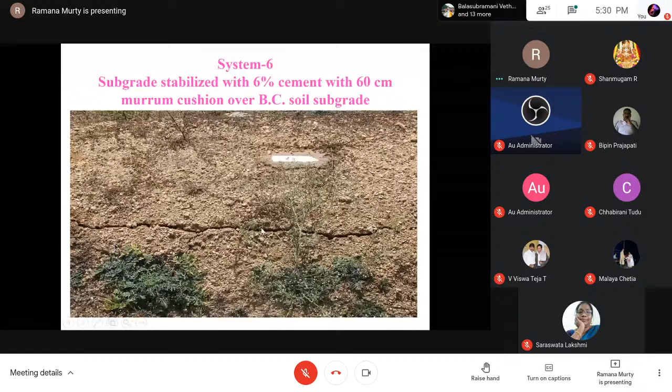Ultimately, see the magic. The smart material geotextile, when scientifically placed, could prevent reflection cracking. What was done here? Instead of stabilizing the ground, directly after removing the grass, the geotextile is placed, and over it 2 feet thickness of murrum soil is placed as urged by the IRC. Now no single crack is formed. That doesn't mean the ground is not cracked - it must have been subjected to desiccation cracking, similar to other structures. But since our geotextile is strong in tension, it did not allow that crack to be reflected to the surface. That is how geotextiles or geosynthetics are considered smart materials. They are light in weight but very effective - smartness comes from lightness and effectiveness. That is why geosynthetics can also be experimented with in expansive soils along with traditional stabilization techniques.

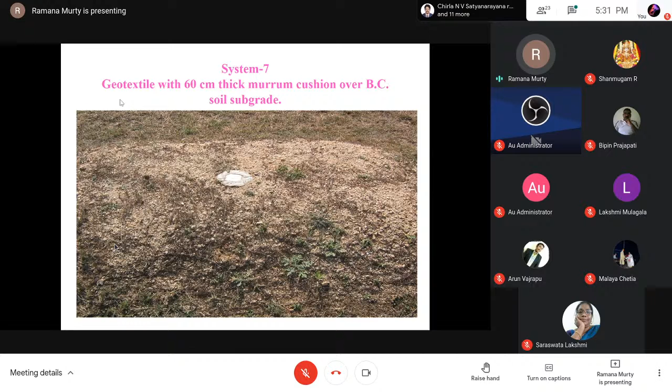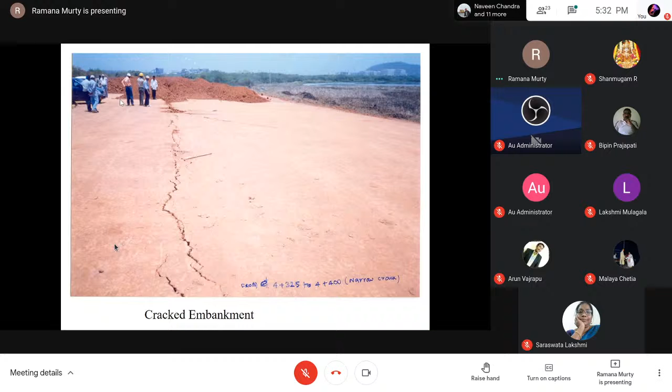So these are other clays. Soft clays have their own problem - not only black cotton soil, soft clays also have their own. Whenever clay is encountered, we have to be very careful. Here, in this soft clay, strip drains were used but they were not given time. When you do not give time - see, after taking meals, 3 to 4 hours is needed before it becomes energy, otherwise it becomes a problem. Same thing is true even when using technology: if you do not give time, the ground cannot absorb it. Unfortunately here, no consolidation settlement occurred, and bearing capacity failure took place.

These are some other clays, friends - shale clay. Don't think only black cotton soil is a problem; other clays are also problematic, and we have to address them suitably. This shale clay, in Adilabad district, almost the entire district, wherever projects were built, this is the only strata I could see. The problem is that through these joints, water could percolate up to a few kilometers down to the reservoir. You will not see any seepage adjacent to the dam, but far away you will see seepage. Grouting etc. were tried at several projects, but ultimately the seepage could not be prevented. So what I suggested was to place a clay blanket of at least 1 foot thickness on the entire reservoir area and roll it. Subsequently, most of the reservoirs became healthy.

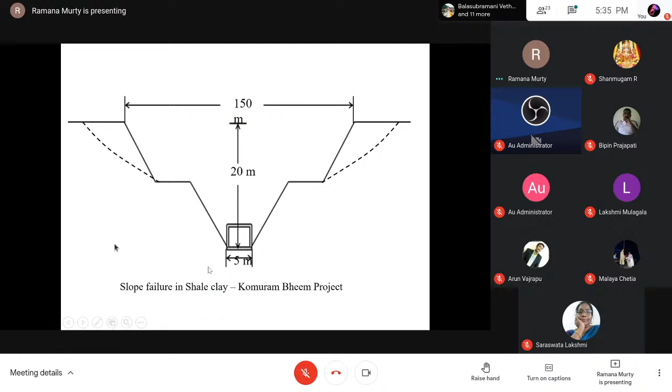They invited experts from Bangalore and elsewhere, who suggested their own way of dealing with the slopes. Ultimately, based on past experience, they knew me and asked me to visit the site. I gave not a geotechnical solution, but a structural solution. It is very difficult to handle these slopes - so let us not handle them. There is no more space here; hills are already there, you cannot excavate and make them flat, and on this side agriculture fields are there - they won't give any more land. So instead of handling all this, simply grow some grass, and even if it collapses, no problem - provide a concrete box of the required area like a tunnel. They successfully built it, and now it is all right, friends.

See, this is the situation of the shale clays. This is the Pranahita Chevella project.

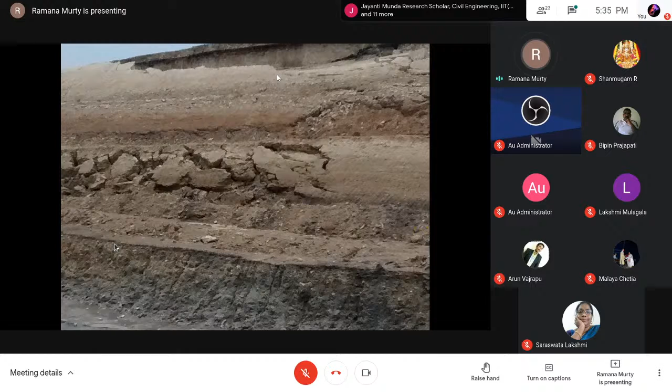Okay, these slopes are again falling. These clays have the problem of intrinsic planes of separation. From outside it seems very nice, but closely you can see the plane is already separating, and during the rainy season it allows water in, and simply the whole slope can slide.

For this type also, we have given some structural solution rather than a geotechnical solution, because the geotechnical solution seemed more costly here.

Good evening, sir, tell me. Myself, Bipin Prajapati from KNIT Sultanpur. Sir, I want to know if we find some expansive soil with certain problems, then what should be the procedure.

To select the material for stabilization, such as fly ash—you have suggested some cementitious material, or you can use foundry sand or other materials—what should be the basis of selection? Is there any selection procedure, rejection procedure, or guideline or flowchart? Okay sir, I could understand—it seems in case black cotton soil is there, how to stabilize using different materials when available, and how to select each material. Is that the question, sir?

Yes sir. Okay, see, normally when black cotton soil is present at a particular construction site, we have to be very clear and open-minded, and should not invite only the stabilization. If you can avoid stabilization, that is also good, sir. First of all, we have to think like that because any stabilization process is costly and laborious—excavation, mixing, recompaction—and in that process if anything goes wrong, it may weaken the whole system. So that is why only when it is required. Fortunately, in the last 23 years of my career here in black cotton soils, without that stabilization, I could handle the problems. Somehow, in case it is essential, then we will definitely adopt it, but otherwise better avoid that stabilization if at all you can avoid it.